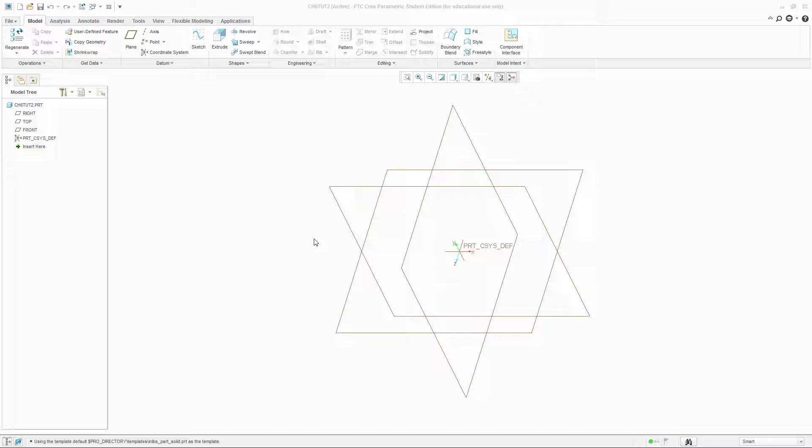In this tutorial, we're going to be taking a look at tutorial 2 in chapter 6. And for this one here, the way that we're going to start this is from the front plane. So I'm going to click on the front plane and select the sketching tool. And then we're going to click on the look at tool so that I can look straight at it.

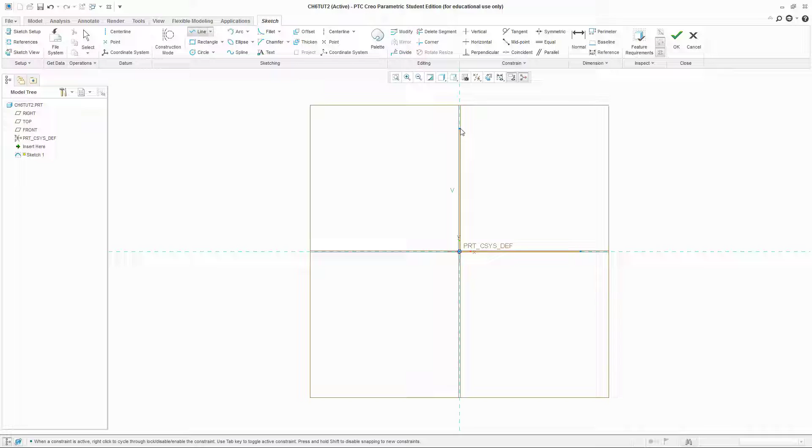And just like every other exercise that I do, I always like to start with just the first two lines that are going to make this up. So we'll draw in the first line here, and I will draw in the vertical line as well. Now at this point I can go ahead and modify these dimensions so that I know about what kind of scale that I'm working with. So the overall length on this is 72, the overall height is 68. Now that I know the scale, I can go ahead and continue to draw the rest of this profile.

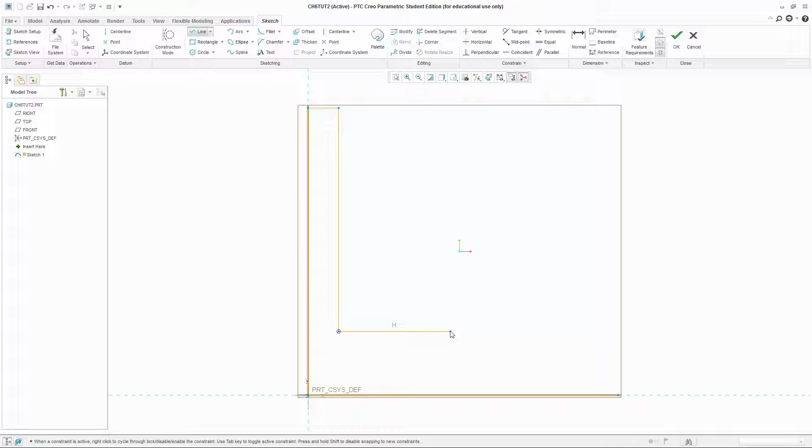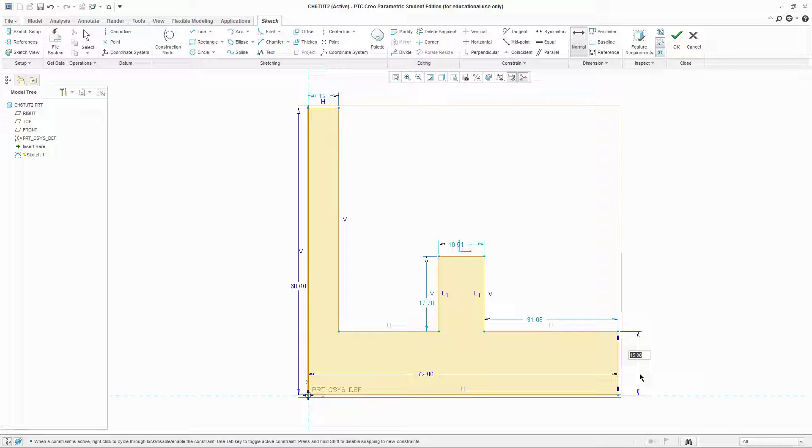So this is going to come over here, down, over, up, over, and I'm making sure not to get equal length constraints where I don't need them. And I can finish the profile here. Now the next step in this is going to be to go ahead and dimension everything that I need to dimension. So we'll go to normal dimension and we'll place the dimension for this line here, which is going to be 8. Dimension for this segment here, which is 18.

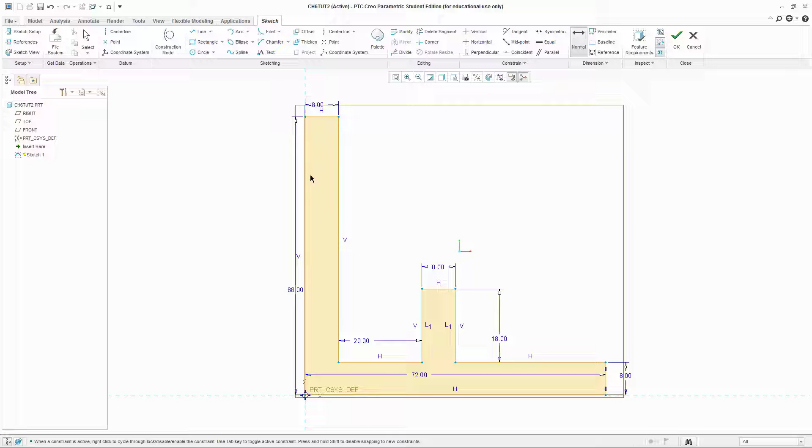The thickness of this is also 8. This segment right here is 20 across. And this distance here is also 8. So now I got to examine this. I look, there's no weak dimensions. I do have a closed profile, so I should be good to go ahead and finish this sketch.

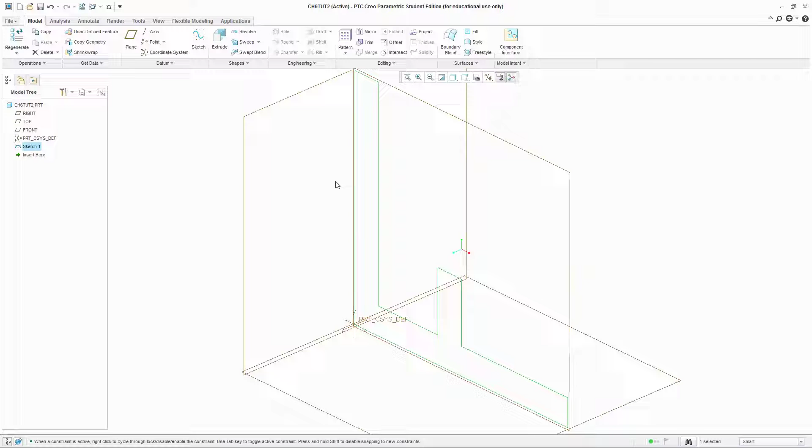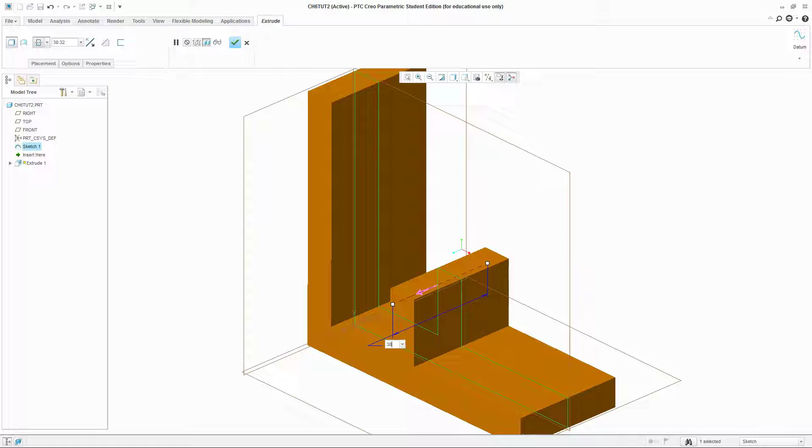And now I will go ahead and extrude this. Now one thing that I'm going to be doing for this one here, since I have features that are centered on this part, I want to extrude this in such a way that I still have my front plane cutting this thing completely in the middle. So when I go to extrude, instead of sending it in one direction only, I'm going to come down here and select the mid-plane extrusion option. That way my front plane is going to still be in the middle and it'll extrude evenly in both directions. The extent of this extrusion is 38. So we'll put in our 38 and hit the checkbox.

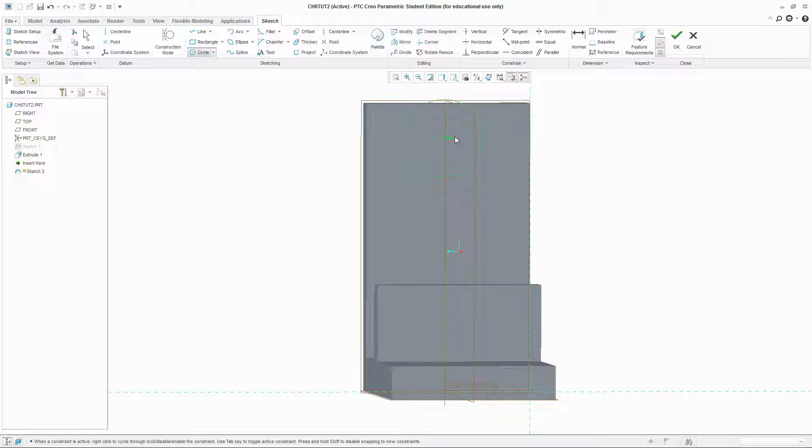So here we have the rough outline of the shape, and we have a couple of additional features that we need to add. I want to click on this face and start my first sketch on here. And again, I'll go to look at just so that I can place this. And then I'm just going to turn it just ever so slightly so that I can still see the depth in this particular object. I want to locate a circle to put this boss feature on here, and this circle is going to have a diameter of 28.

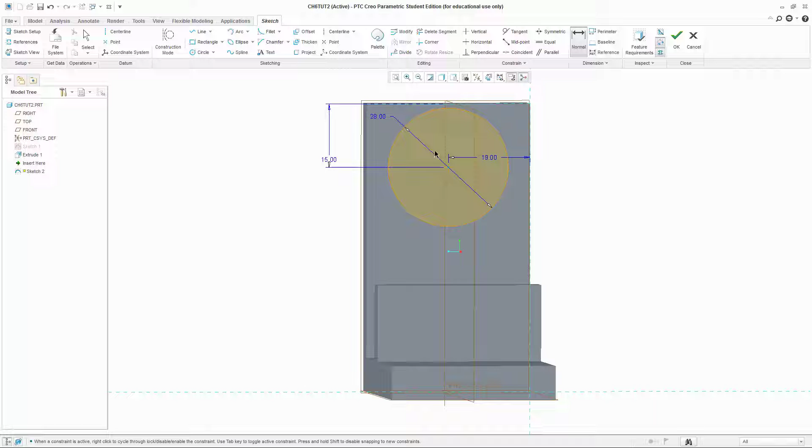And then I can place the dimensions. The dimension from the top of the object is 15. And the dimension from the side of the object will be equal to half of the object, so it's going to be 19. So now that I have this thing in the middle, I'm going to orbit just a little bit, and we're going to finish this sketch and extrude this object also. And it sticks out a total distance of 17. Hit my checkbox.

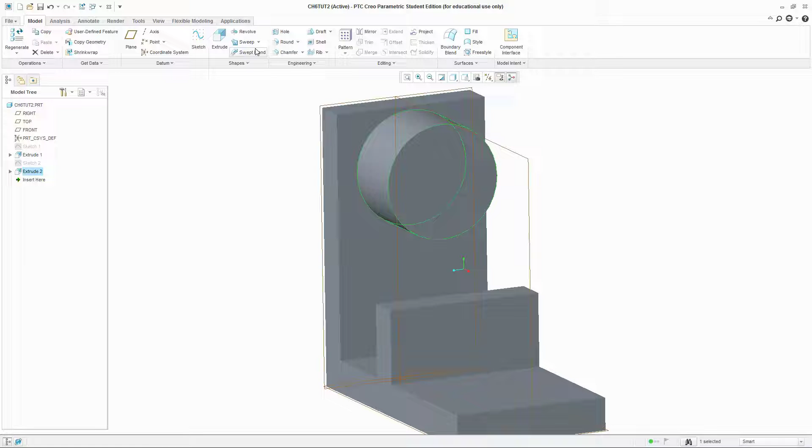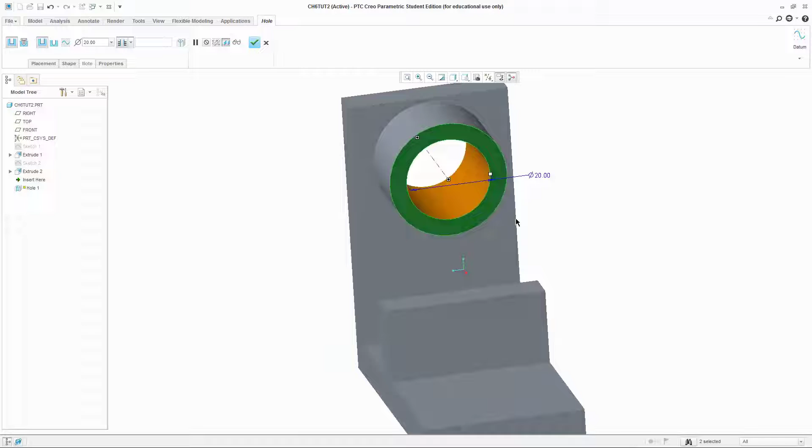And now the only thing I have left to do here is put the hole through it. So we'll go to the hole command. I'm going to left click on this face, hit Control and select the axis, which lines up this hole on this axis perfectly. I want to set the option on the hole depth to through all, and we're going to change our diameter to 20. Once all the parameters are set, I can click the box to finish.

Now I need to go back and create this ribbed feature that is running in this area here. So I'm going to click back on the front plane, which is the whole reason that I did the mid-plane extrusion initially, is so that I would still have this to work from. I can now click Sketch, and at this point I want to go ahead and use the look at feature and then move it just slightly again just so that I can see everything.

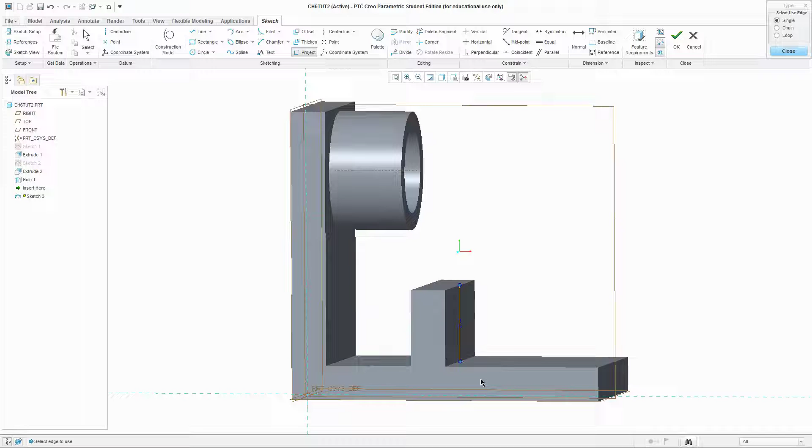I am going to project this edge and this edge, but then I'm going to delete both of those segments so that the only geometry left behind is the reference lines used to create it. And in this case I'm going to draw a line from here to here. I want to make sure that I don't accidentally grab a midpoint and don't accidentally grab an edge. So now I can place the dimensions for this part. I know that the distance here is going to be 32. So we'll go from here to this point and place the dimension down here at 32.

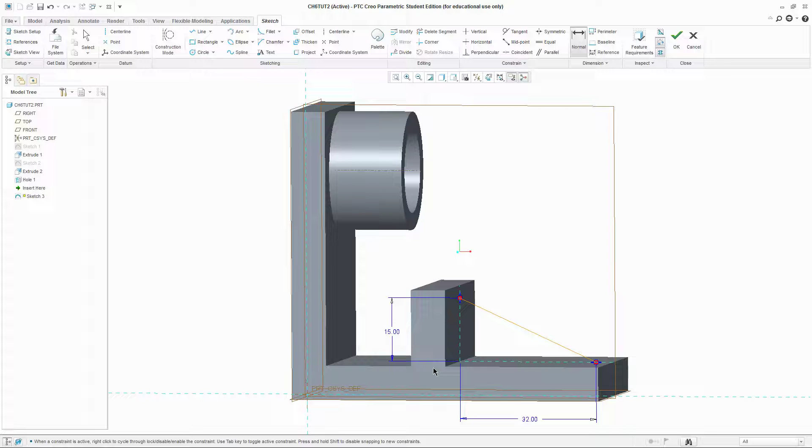The height of this particular object is given at 15. So if I click here to here and locate my dimension over here, I can place this in at 15. Now, since I'm going to use a profile rib for this particular feature, I only need a single line to create this rib. This is going to serve as the profile of the rib, so I can say OK. It's one of the few situations where an open-ended, unshaded sketch is actually what I'm looking for.

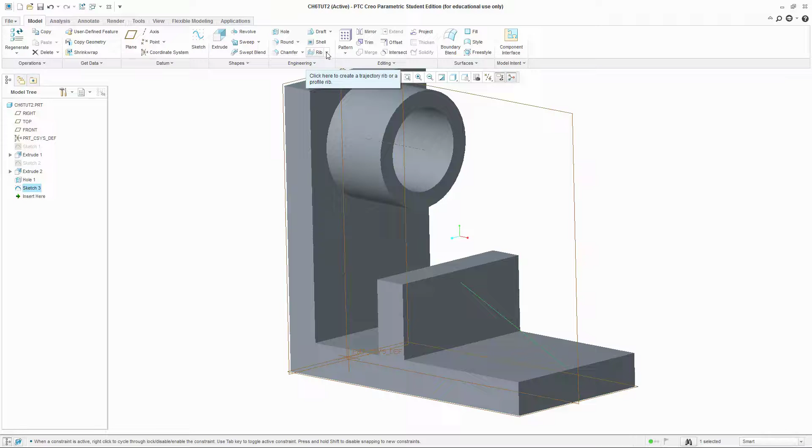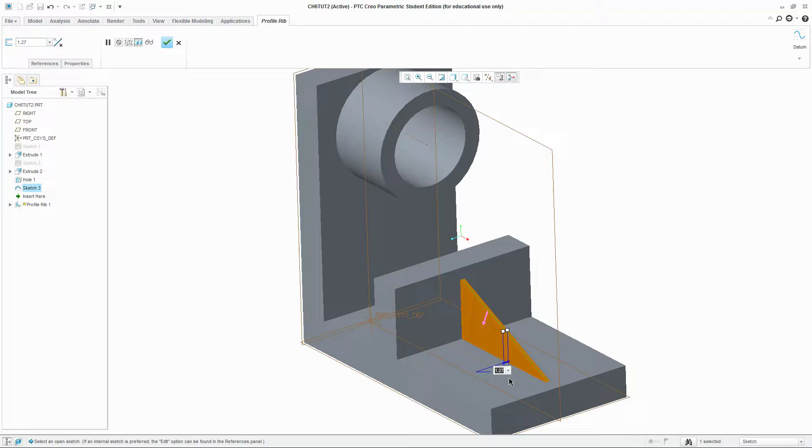So now I'm going to come up here where it says rib, and I'm going to click the drop down and go to profile rib. And this is going to give me an arrow, and if I orbit this around, I can see that that arrow is facing the wrong way. If I just double click it or single click it, it is going to switch directions. It's automatically going to be set up to split the thickness in both directions. So all I have to do is come in here and change my thickness to 8 for this profile rib, and then I can hit the checkbox.

So with just a couple of commands, we had our first extrusion, which we extruded both ways, added our boss, the hole, and then placed a rib, and that completes tutorial 2 in chapter 6.